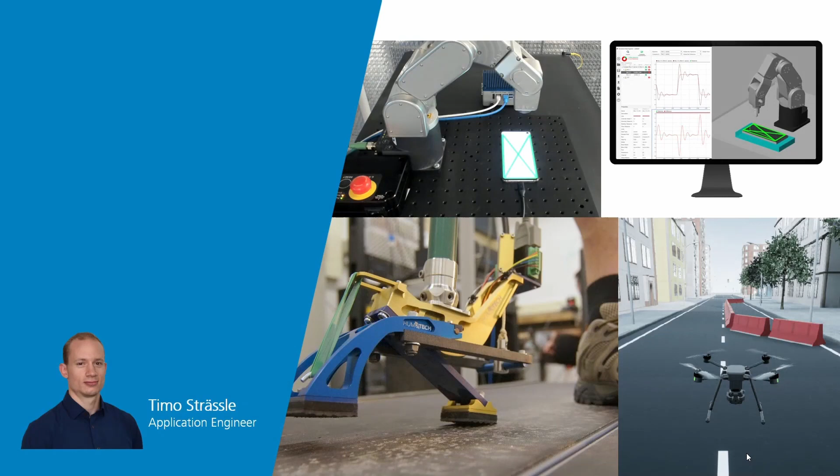In today's webinar, I will show you how to use Speedgoat real-time testing solutions to accelerate development of autonomous systems and other robotics applications, like industrial automation or vision processing systems.

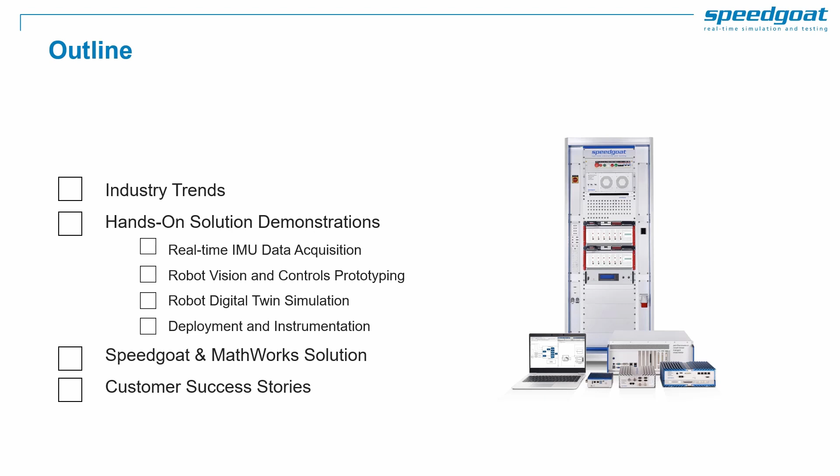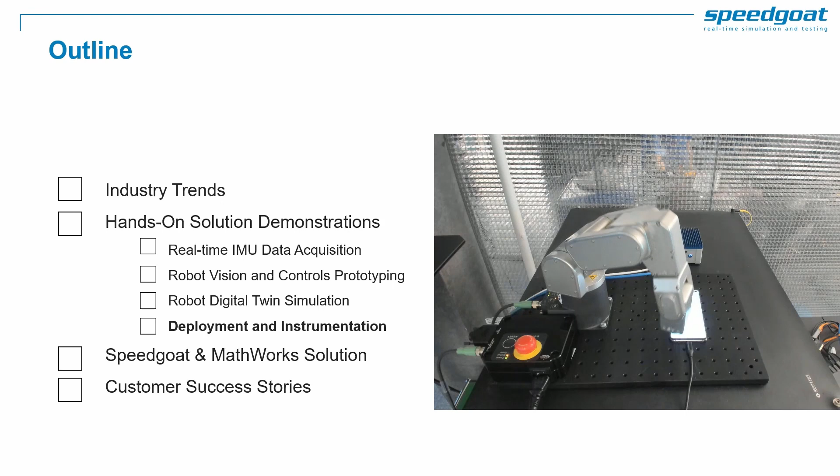We'll start with an overview of some of the main challenges we see in the area of robotics and autonomous systems. Then we'll go over multiple examples and workflow demonstrations using Speedgoat target hardware and Simulink Real-Time. I'll start with data acquisition from an IMU, followed by controls prototyping for a vision-guided robot. We'll see how you can design a digital twin for virtual testing. And lastly, an example for deployment and instrumentation.

In the end, I'll wrap it up by giving you a full overview of the combined Speedgoat and MathWorks solution for real-time testing and give you some insight into how our customers apply these tools in the field.

Let's start with an overview of the main driving industries for robotics. Although there are many other applications, we see the biggest interest in the following fields. Firstly, the medical sector. Robot-assisted surgery is a huge topic, here illustrated with a heart surgery robot by our customer Corindus. Rehabilitation equipment also benefits from robotic systems developed with Speedgoat hardware, like the ankle-foot prosthesis by Humotech.

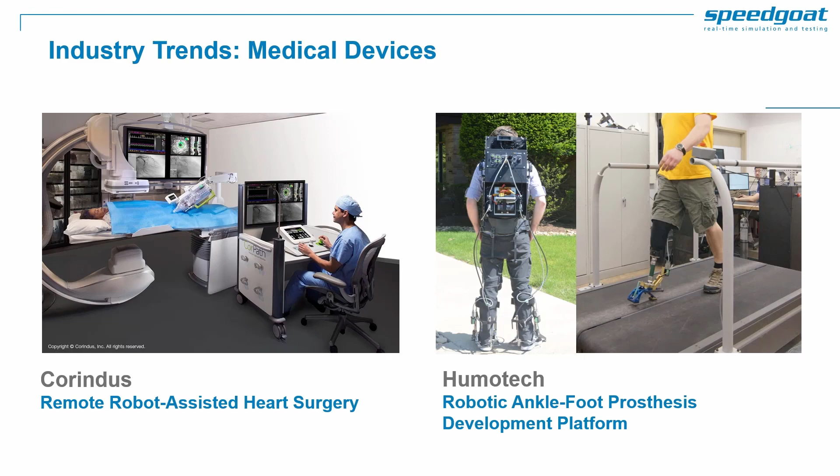Another strongly growing industry is mobile robotics. Research facilities around the world are using Speedgoat real-time systems to develop autonomous mobile robots operating in water, on land and even in space, using all kinds of locomotion methods.

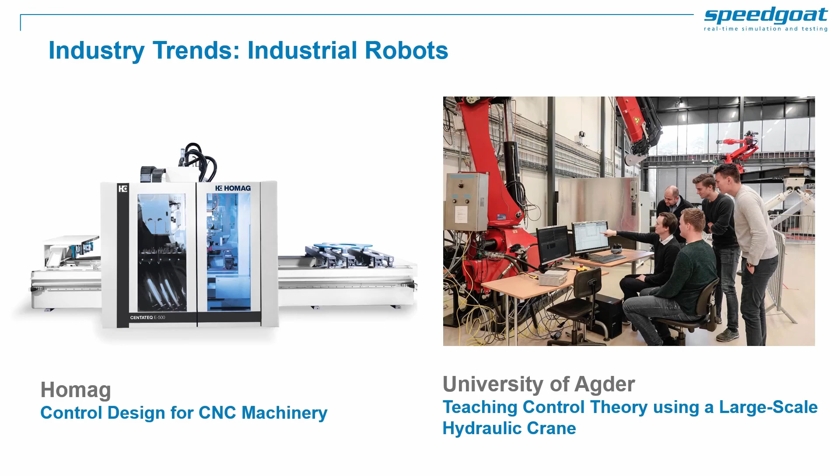Industrial robots used in manufacturing make processes continuously more efficient, reliable and safe. For example, HOMAG uses Speedgoat machines to develop cutting-edge control algorithms for CNC machines. And University of Agder is training the next generation of mechatronics engineers using a large-scale hydraulic crane controlled by Speedgoat.

All of these areas have some challenges in common. They typically require you to develop and test complex control systems, to control many degrees of freedom with high precision. Maybe you want to use modern methods like model predictive control or reinforcement learning.

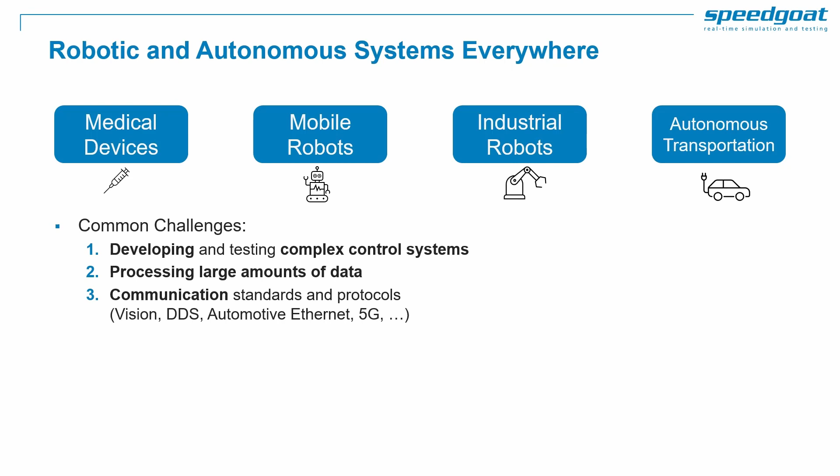To achieve automation, there's often a large amount of sensor data which needs to be fused and processed in real time. The data is also often transferred using new communication protocols. Maybe you need to incorporate cameras or LiDAR, or want to set up data distribution service between different devices.

Lastly, many areas require strict safety and certification requirements to be met. So you need to perform rigorous testing as development progresses. Keeping up with the pace of innovation is a challenge of its own. Leading engineering companies have to deliver smarter and more power-efficient products to stay competitive in such a dynamic market.

To address these challenges, robotics engineers have been progressively relying on model-based design and real-time simulation and testing to efficiently design, develop and test their new embedded controllers.

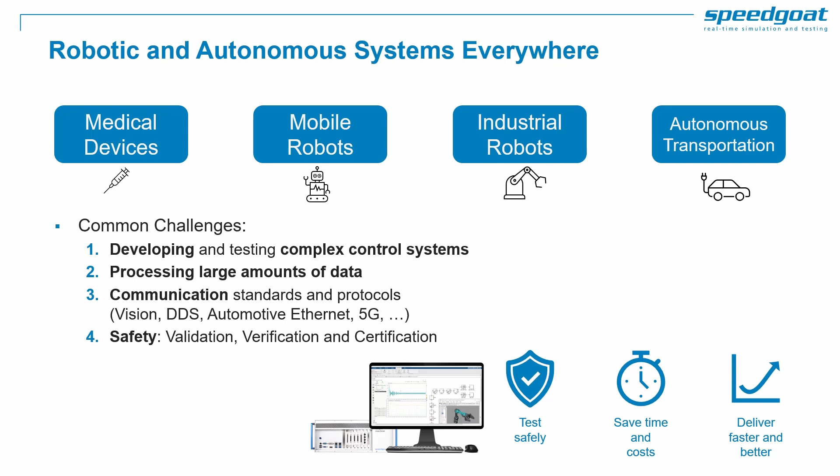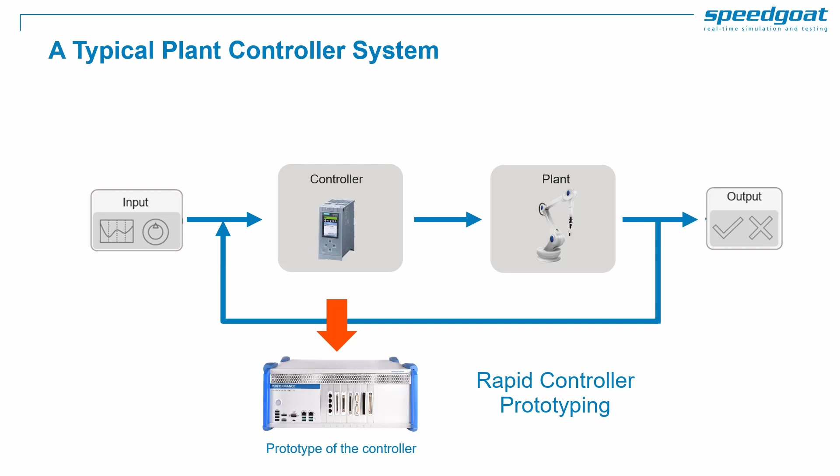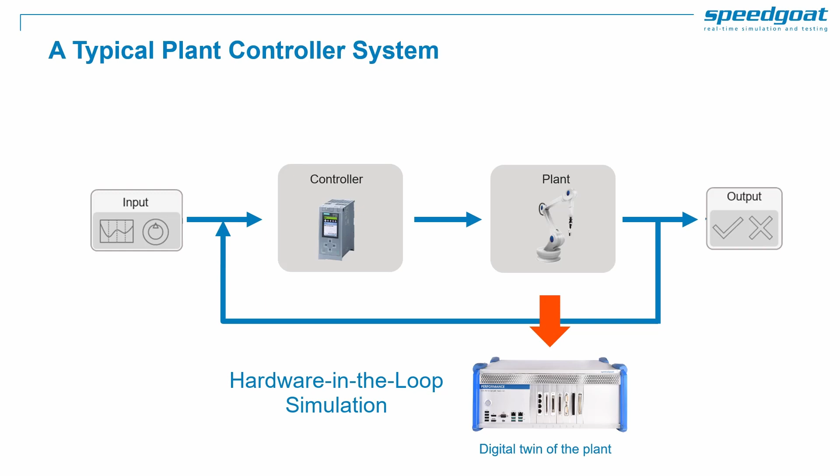In a later step, you want to test your embedded controller extensively in realistic scenarios. You can do this by connecting it to the Speedgoat target machine working as a HIL simulator, running a digital twin of the plant. This allows you to test earlier, automate your tests, and cover edge cases, which would be dangerous using the real plant. As you can see, the real-time target machine forms an essential component in prototyping a plant controller system.

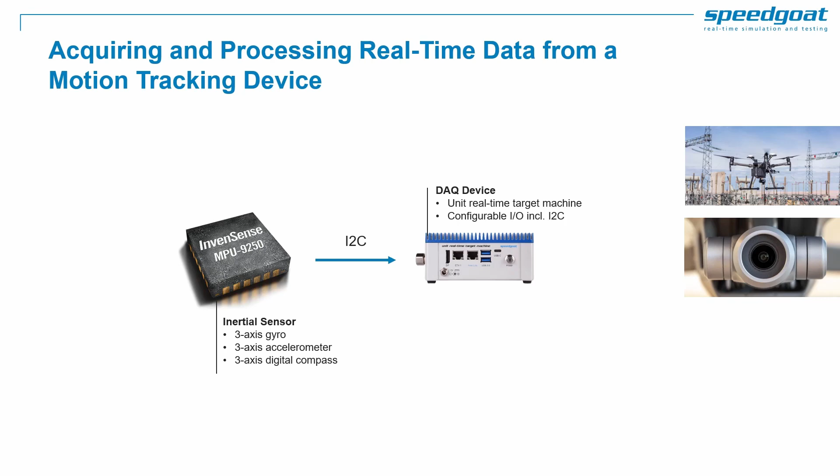Let's now look at our first example of a workflow needed before you even start working on your controller. When starting real-time testing, you often need to integrate new components, like sensors and actuators, and set up the required interfaces. Perhaps your goal is developing a UAV attitude controller, a camera stabilizer, or a new multi-joint legged robot, and this requires you to interface with inertial sensors.

I'd like to show you how you can combine Simulink with Speedgoat hardware to support you on such tasks. More specifically, we will connect to an inertial sensor, perform spontaneous real-time measurements and data pre-processing. I'm using a 9-axis inertial sensor which communicates over an I2C protocol, a common serial interface. To set up and test the sensor, I use a Speedgoat unit real-time target machine, our smallest form factor. So let me switch to MATLAB and Simulink to show you how this works.

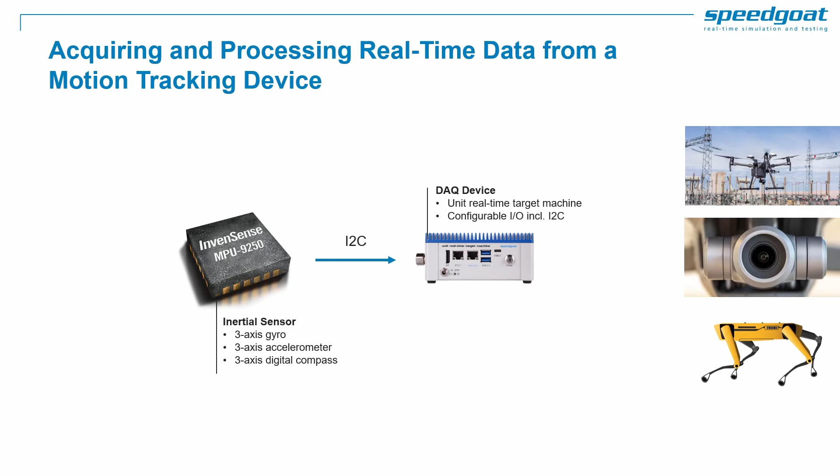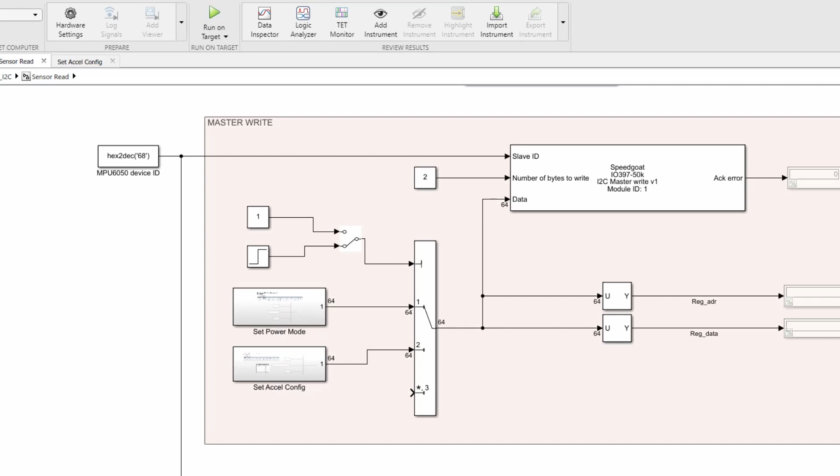In the Simulink model, you can see on the left side the subsystem where we take the sensor readings from the IMU. To communicate with the sensor, I'm using the IO397 configurable I/O module. Configurable means that it can easily be reprogrammed with configuration files that enable different functionalities, such as the I2C interface which I'm using here. For communication, we need the device ID and register addresses to read from or write to. I set up 2 write signals here to configure the sensor, and then we want to continuously read out 14 bytes of data containing the accelerometer, temperature and gyroscope data.

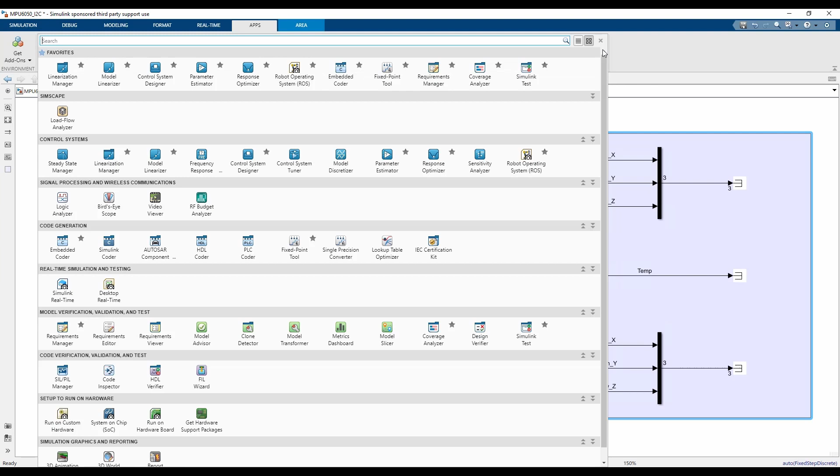I have already selected these output signals for logging to the simulation data inspector. To log additional signals, just click on it and choose Log Selected Signal. My model is already configured for real-time execution, but for any other Simulink model, you could simply go to the Apps tool strip and select Simulink Real-Time to adjust the needed settings. Namely, this will configure the model to use a fixed step solver and generate code for Simulink real-time targets.

Directly from the Simulink tool strip, I can now click Run on Target, which will compile, deploy and run the model on the Speedgoat real-time target machine. While the model is running in real time, I can observe the logged signals in the simulation data inspector and verify that we are in fact getting sensor data, and the signals reflect the movement of the sensor.

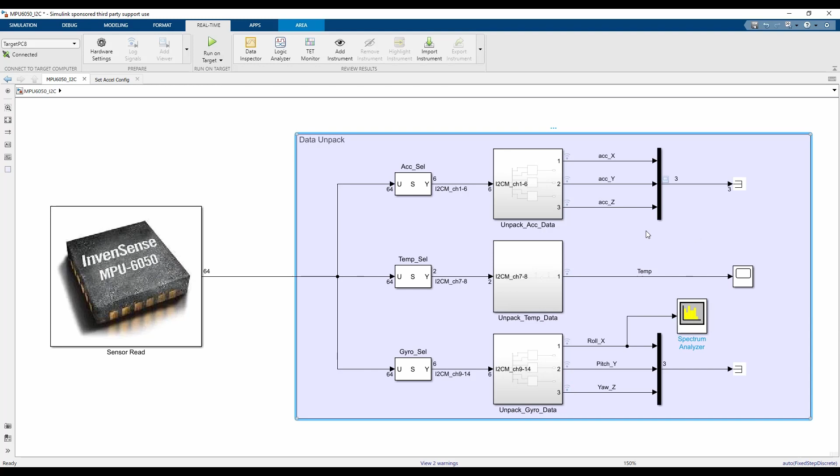Aside from the simulation data inspector, you can also use specific Simulink blocks to analyze your signals, like a scope or a spectrum analyzer. Similar to SDI, these blocks allow us to visualize the data while the model is running. The scope has many functionalities similar to an oscilloscope, like cursor measurements, bilevel measurements or triggering. The spectrum analyzer could be useful, for example, to analyze the noise in our IMU signals and design a filter to improve the signal-to-noise ratio.

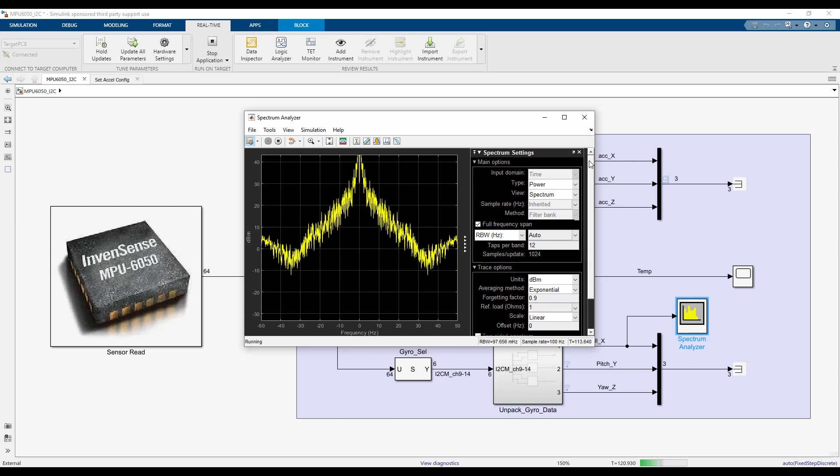I hope this illustrates how quickly you can run your models on Speedgoat targets directly from Simulink and connect with sensors and other hardware using the Speedgoat I/O block set.

Allow me to share the success story of our customer Preceyes, who has used Speedgoat and Simulink Real-Time to develop the world's first eye surgery robot. While constructing a model of the robot's kinematics and dynamics, the engineers use data acquisition workflows for system identification. They use Speedgoat target hardware with EtherCAT interfaces to excite the robot's motors and measure the response. The team then used the same target hardware to develop a controller model that processes input from a joystick and around 60 sensors and generates motor commands in response to the surgeon's movement.

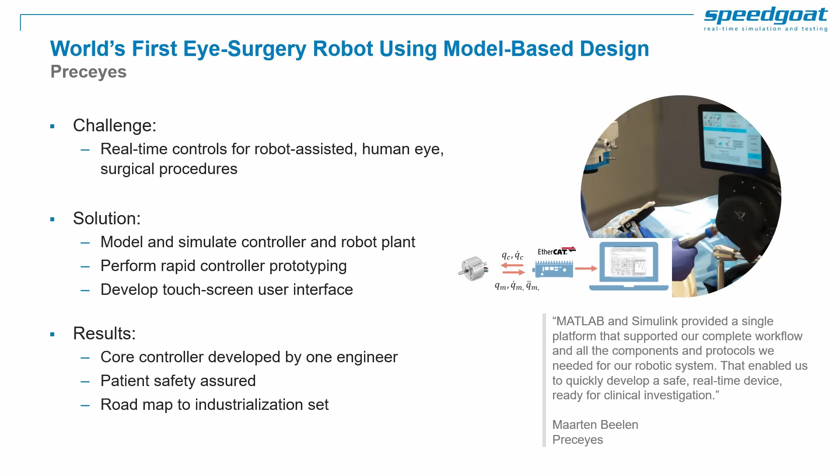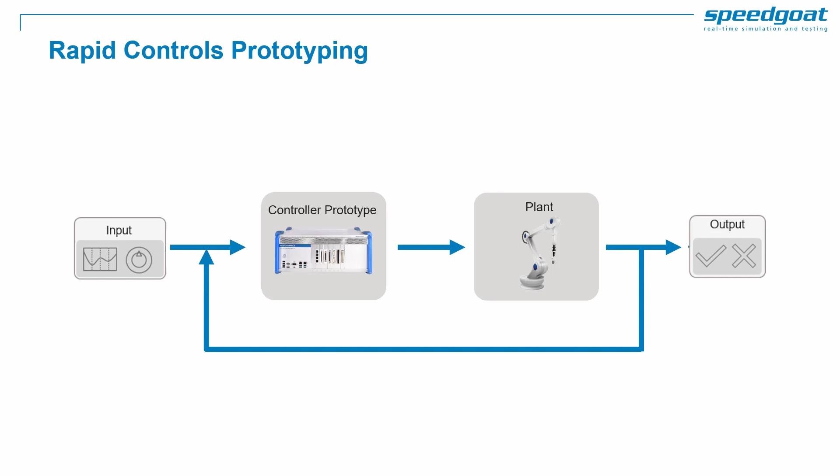So they followed up data acquisition with rapid controls prototyping, which is what we will look at in the next example. We'll work with a prototype controller deployed to a Speedgoat machine, and the plant will be an actual industry-grade robotic arm with a gripper.

Let's imagine a scenario where you develop a factory robot, which is used to detect and remove defective or faulty parts from a conveyor belt. Inspection of the parts is done using images from a gigabit Ethernet camera, and the defective parts are detected with computer vision. The Speedgoat performance real-time target machine will handle this task, as well as generating movement commands for the robot to pick and remove the respective parts. The communication interfaces in this example are gigabit Ethernet for the camera input and EtherCAT, a widely used industrial protocol to control the robot arm.

This is my hardware setup for testing. As objects, I'm simply using differently colored balls, where the red ones represent defective parts which need to be removed. The camera is mounted in a fixed angle overhead, on the opposite side of the robot.

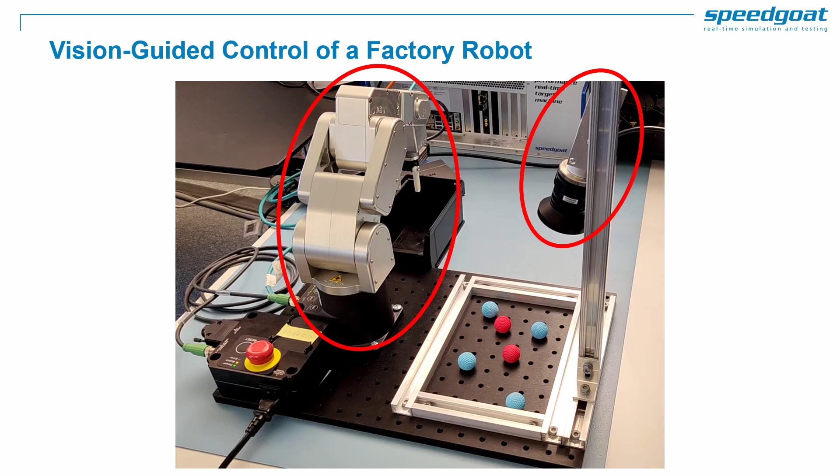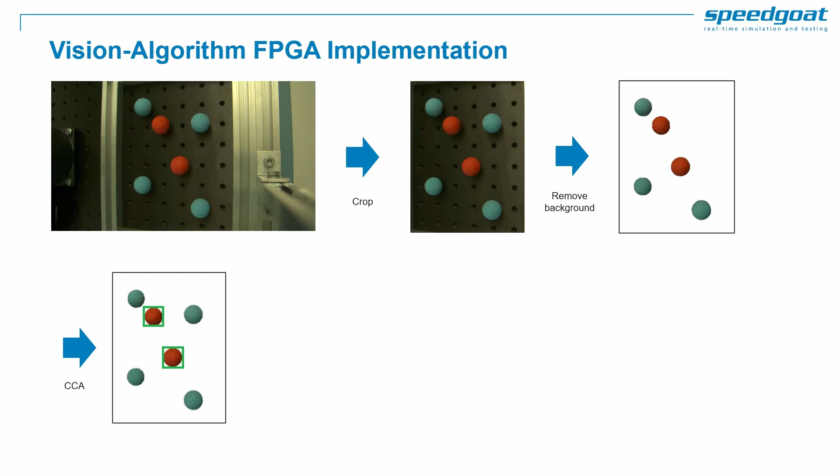Let's first see how the computer vision algorithm works on a very high level. The overhead camera image is cropped to the area of interest, and thresholding on an intensity image is used to remove the background. An algorithm for connected component analysis, or CCA for short, then calculates the bounding boxes and center coordinates for each object, and we filter them by primary color to detect the red balls. Finally, we transform the detections from the pixel coordinates into the robot's frame of reference and send them down the data stream.

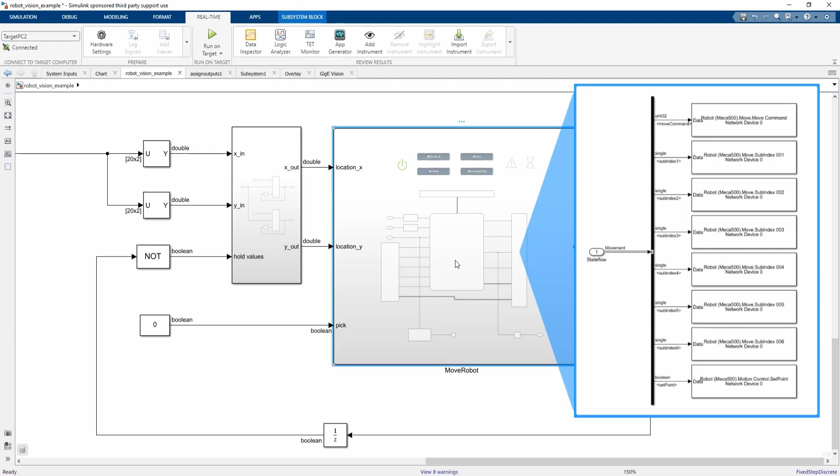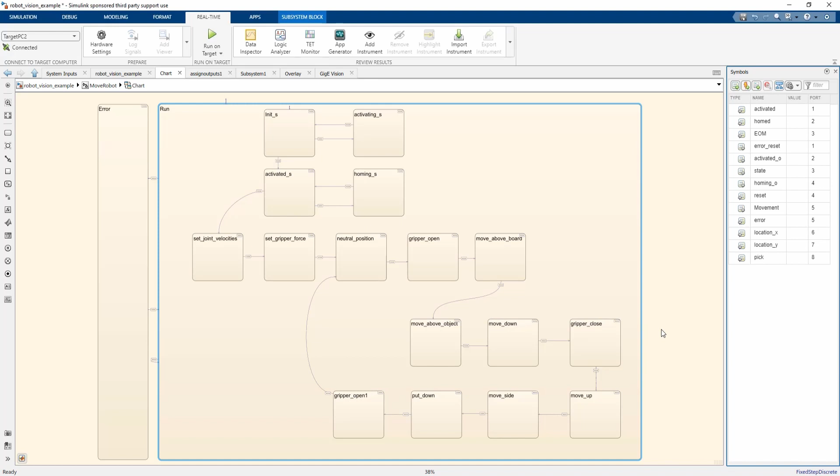The object detections are then fed into the supervisory controller for the robot arm as planar X and Y coordinates. The move commands generated by the controller are sent to the robot using EtherCAT transmit blocks from the Speedgoat I/O block set. I won't go into the details of the inner workings of the controls, but it basically consists of a state machine which goes through all the necessary initialization steps, then keeps the robot in a neutral position until we trigger it to pick an object. Once we do that, a trajectory to the object is generated, the robot moves to pick it up and puts it in a container to the side.

I have also added 2 dashboard indicators to observe the state of the system and a trigger button. I'm already connected to the real-time target machine, as we can see in the top left corner of the Simulink tool strip. So I just click Run on Target and the model is compiled, loaded and executed on the target.

You can see the robot on camera here, and the dashboard shows that it is initialized and objects have been detected. So when I click the Pick button, the robot will move to the first object from the list and remove it. I simply click the button again while objects are still being detected. Of course, this could be fully automated later, but for testing it is handy to have these controls.

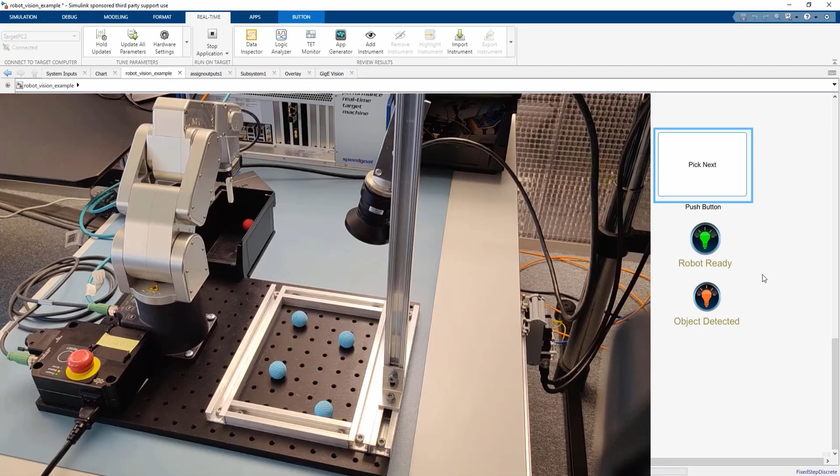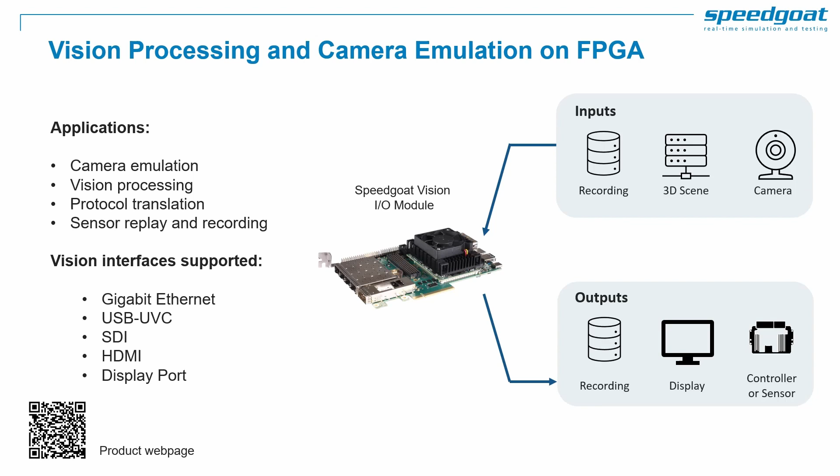Now you might still wonder how the target machine is able to process high-resolution video data in real time. The vision algorithm is actually running on an FPGA, our real-time vision processing I/O module. It supports various vision interfaces, such as USB UVC, Gigabit Ethernet, SDI and HDMI. With clock rates in the range of 100 MHz, it allows to process high-resolution, high frame rate video streams in real time. It can read in or emulate multiple cameras simultaneously, record and replay files, and is fully Simulink programmable.

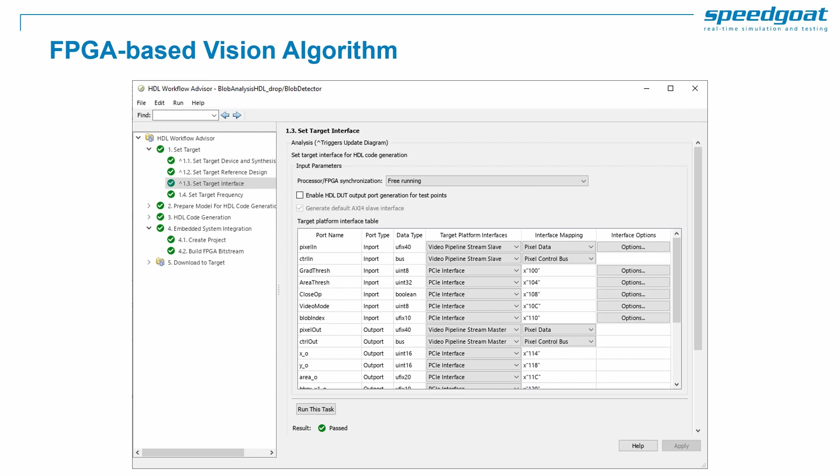The algorithm I'm using in the robot example is based on a shipping example from MathWorks Vision HDL Toolbox, which I am linking here. This model is a bit too complex to discuss here in detail, but I encourage you to take a look for yourself. From this Simulink model, we can then generate HDL code to deploy to the FPGA by simply going through the HDL Workflow Advisor. This is where we map Simulink signals to hardware interfaces, define clock rates, and so on. It's a simple step-by-step process, allowing you to seamlessly integrate high-speed vision processing into your real-time tests. And this wraps up our vision-guided robot example.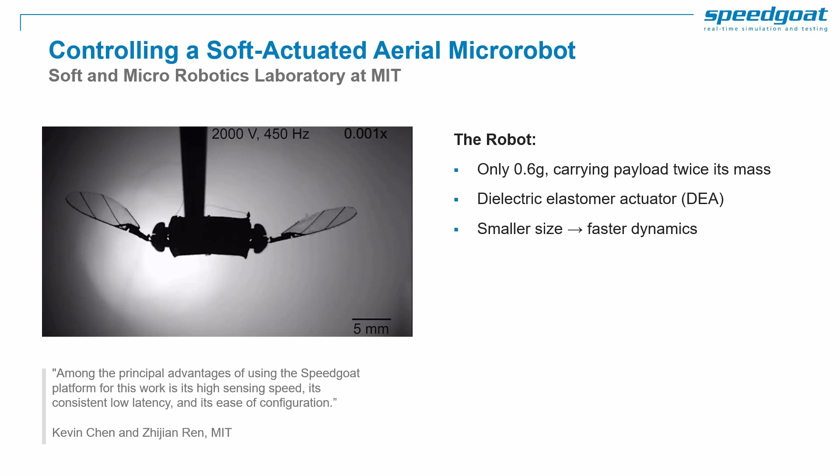To conclude the RCP section, I'll share a customer story from the Soft and Micro-robotics laboratory at MIT. The researchers are using artificial muscles to power insect-like aerial micro-robots. As the size of these robots shrinks, the dynamics become faster, therefore requiring higher sensing and control rates. With 450 wing flaps per second, the feedback control needs to run at 10 kHz frequency.

The researchers model and simulate the dynamics at different fidelity levels to identify the optimal wing shape. Various experiments are performed to identify the mapping from actuator inputs to lift, resulting in an accurate flight dynamics model. This is then used to test new control algorithms in closed loop without risk of damaging the real robot. And finally, the controls are seamlessly tested using the real robot by interfacing the Speedgoat machine with a Vicon motion capture system and sending actuator commands to the robot.

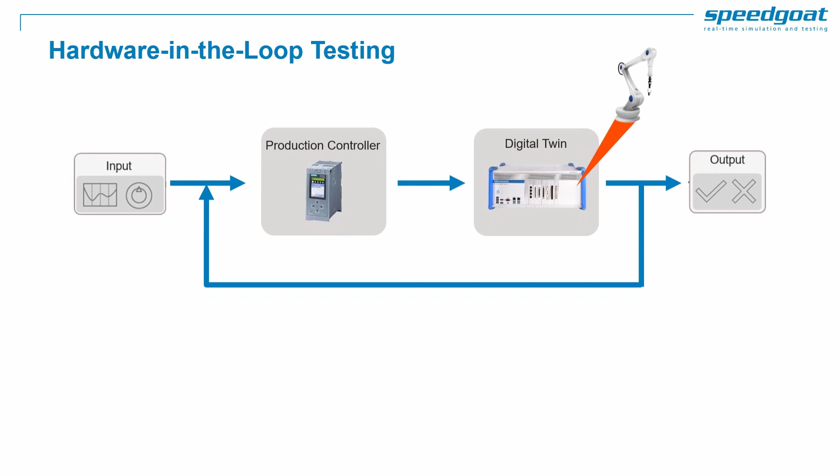Up next, I would like to discuss an example for hardware-in-the-loop testing. This is where you test your production controller against a digital twin of your plant. Some of the main benefits of HIL are: you can test in a safe, yet completely realistic environment. You avoid a lot of logistics overhead from only testing with prototypes. You can even test when the real system is unavailable, and therefore start testing earlier. Virtual testing can also be fully automated.

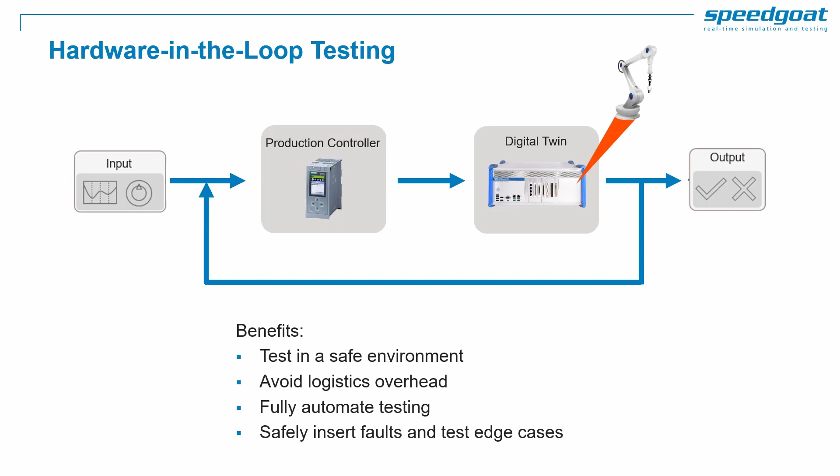You can go through various test cases and accumulate hours worth of test data without requiring any user input after the start command. And last but not least, you can inject faults and test edge cases of your controls problem without risk of damaging the real system. A main challenge here is often how to create a realistic and accurate digital twin model of your real system. Let's look at an example for our Meca500 robot.

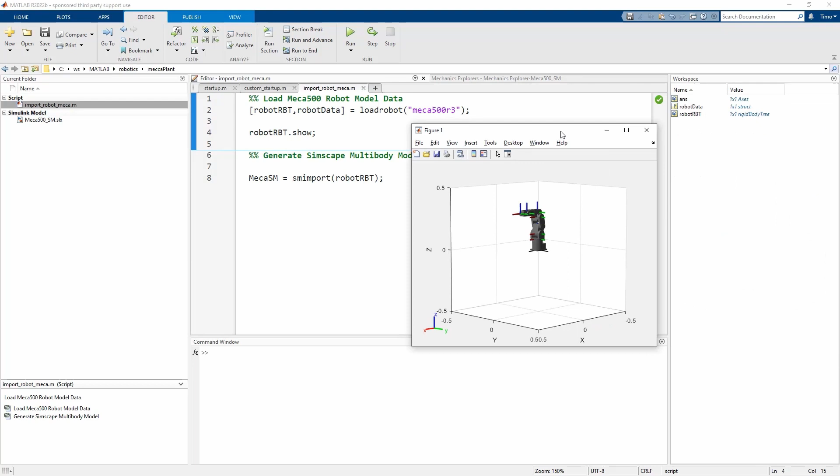When you buy robotic components off the shelf, you typically get the CAD 3D models with it, so I'd like to show you how you can use those for creating a Simscape model. For the Meca500 robot, the CAD data is even directly included in Robotics System Toolbox, along with many other 3D models. One simple command loads the data, and we can already view a 3D representation of the robot.

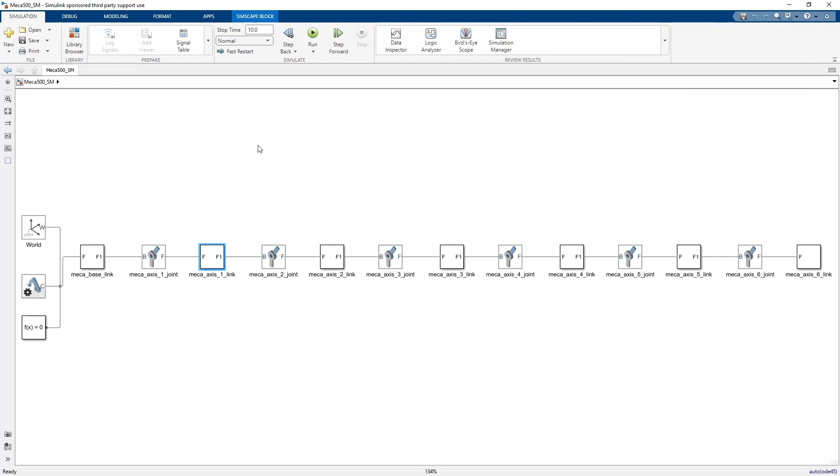Using the function smimport, we can then generate a Simscape Multibody model from it. Here we can see the generated links and joints, adjust parameters such as inertia and mass distribution, or let MATLAB automatically calculate these values from the parts geometry. When we simulate this model, the Mechanics Explorer shows us a 3D visualization of the scene.

So this is just a blueprint model with no controller yet, but it can quickly be used to perform kinematic or dynamic simulations and develop motion planning and motor control algorithms. To get a head start in adding the controls, we can, for example, refer to one of the many examples shipped with Robotics System Toolbox. The example, Model and Control a Manipulator Arm with Robotics and Simscape, seems perfectly suited for this.

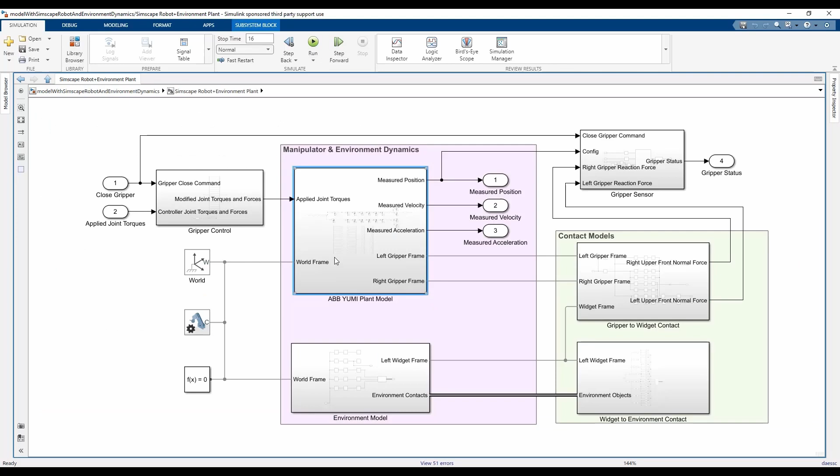When we open the model, we can find a similar Simscape implementation of a different robot arm, which we could replace with the one generated from our CAD model. Then we have models for gripper control, joint torque control, and trajectory planning, which we can explore, customize, and adapt to our needs.

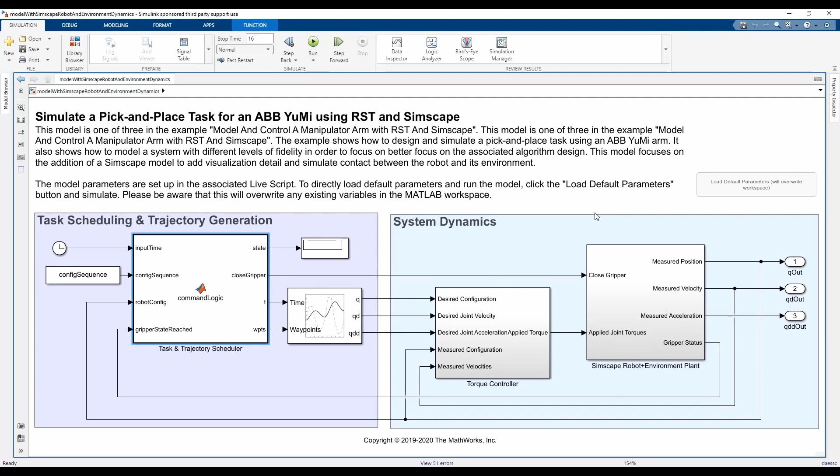In a recent master thesis project sponsored by Speedgoat, the student implemented such a digital twin model of the Meca500 robot to test his controls for use of the robot as an automated touch device tester. He enabled the robot to automatically perform a full factory test of touchscreen devices, such as a smartphone. We will come back to this application in the next example, so keep this in mind.

But first, I'd like to share another interesting customer success story involving digital twin HIL simulation. Our customer Leclanché develops lithium-ion battery packs for automated guided vehicles for factories and warehouses. This includes optimizing battery management systems, state of charge and state of health estimation. But running tests on real batteries has limited coverage, is very time-consuming and prone to errors.

Another drawback is a lack of preliminary testing possibilities, which means bugs can often only be found in later development stages. Leclanché decided to address these issues with a hardware-in-the-loop test bench from Speedgoat. With full cell emulation and detailed battery models built with Simulink, they can now automate many of their tests and test edge cases, faults and disturbances safely in simulation. This cut testing time in half, while increasing test coverage and allowing for much earlier bug detection.

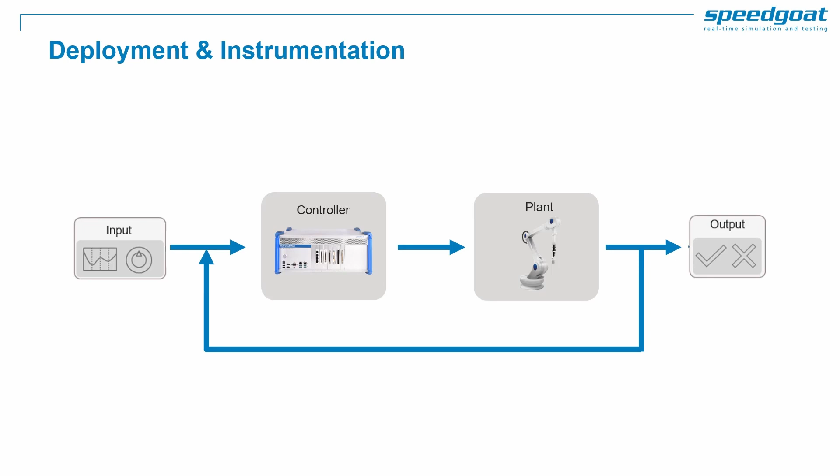Now for the fourth and final application example for today, we'll look into deployment and instrumentation. At this stage, you may want to open up access to your real-time application for non-Simulink users, like test engineers, and provide them with customized user interfaces. Let's revisit the example of our robotic touch device tester.

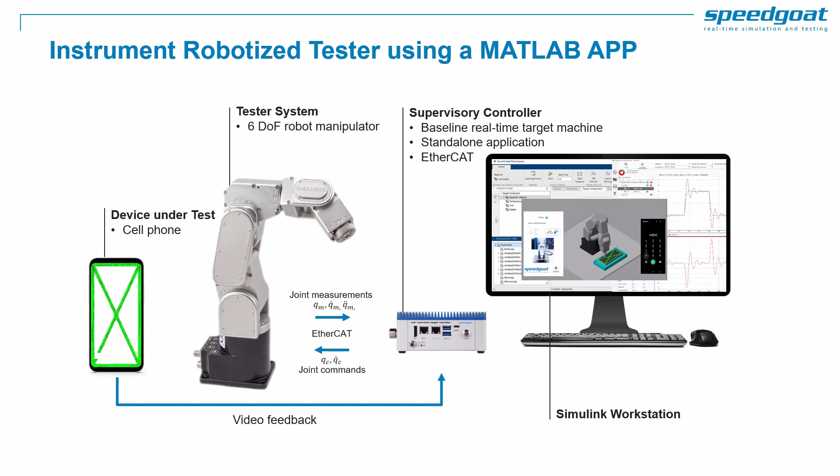At this stage, you finished fine-tuning of the supervisory controller to control the 6 degrees of freedom manipulator using the Speedgoat with EtherCAT interface. It is now time for you to design a user interface that will be later used by operators to run automated test routines. In this case, you can use MATLAB App Designer and its integration with Simulink Real-Time to quickly create standalone user interfaces.

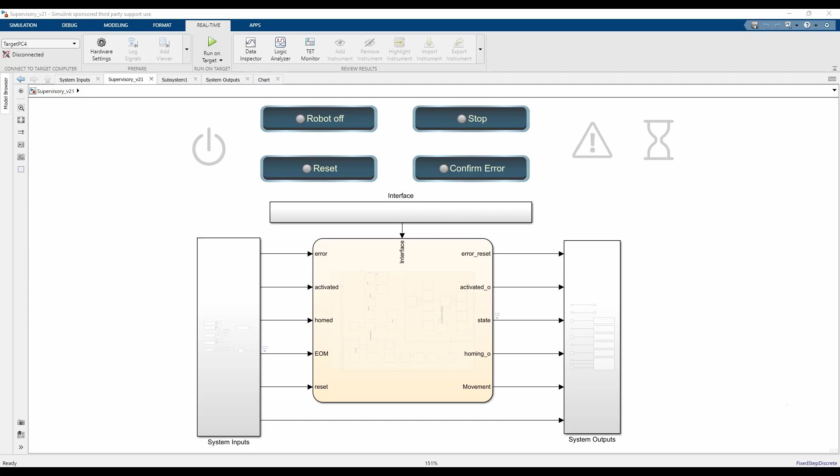The Simulink model is quite similar to the motion control part from the last example, with different trajectories. But what we will focus on now is the user interface built with MATLAB App Designer. Here you can see the App Designer window and the app I have created so far. This is the design view, where we see a graphical preview of our user interface, which we can modify with just drag and drop.

There is a UI axis plot where I will display the phone screen image, and then we have some buttons and status lamps to interact with the robot. Of course, we need to code what's going to happen when each button is pushed, so this is done using callback functions. We can jump to the callback function by right-clicking the UI element and selecting the callback, which will switch over to the code view.

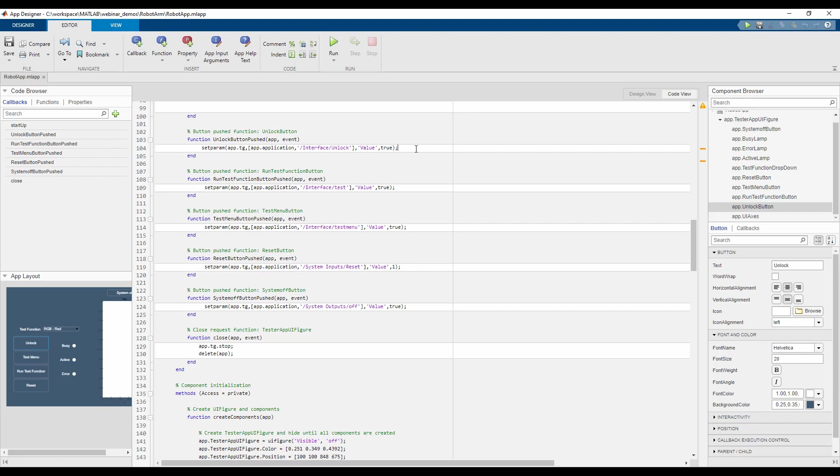The grayed out parts of the code are automatically created when you add an element in the design view, and we only need to add the core functionalities. Here we are setting some parameters on the target machine using the setParam command. Similar for the lamp indicators, we have functions to set the color based on status changes.

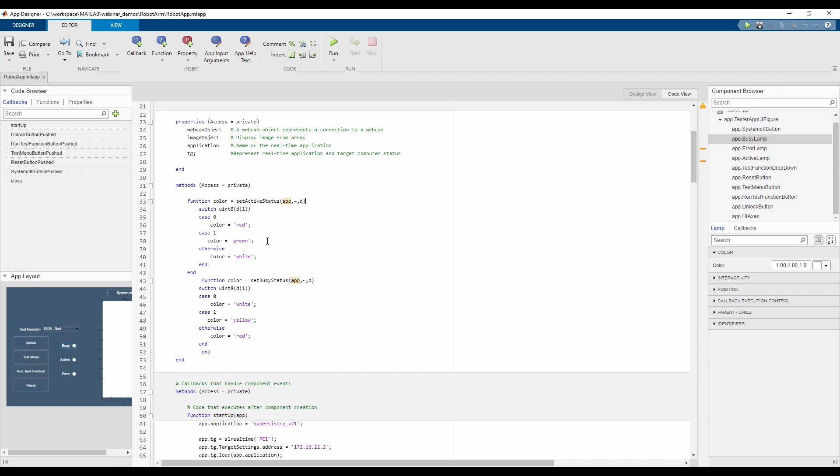What's still missing though are some buttons to interact with the target machine itself. In the App Designer library, we can find some pre-built buttons from Simulink Real-Time. These require no coding at all, taking a lot of work off my shoulders. I think I will need a drop-down menu to select the target machine and a start button, of course. And before we can start, we also need to connect to the target machine. And finally, it's always a good idea to have some status indicators.

As said, these buttons work without any additional coding, but sometimes you still want to add additional functionalities. In that case, you can still add another callback function. App Designer then creates the function stub, and you can simply add everything else you need the function to do. When we're ready to test our app, you just click the Run button and App Designer will compile and start your app. So now, let's see our robotic touch device tester in action.

On the left side, you can see the screen capture of the MATLAB app I just showed you, and on the right, a camera view of the robot. We only have to click a few buttons now, and the robot will do all of the work for us. First, we start the real-time application on the target computer, and the robot will automatically perform a homing movement. Then we proceed with telling the robot to unlock the test phone with the factory default PIN code.

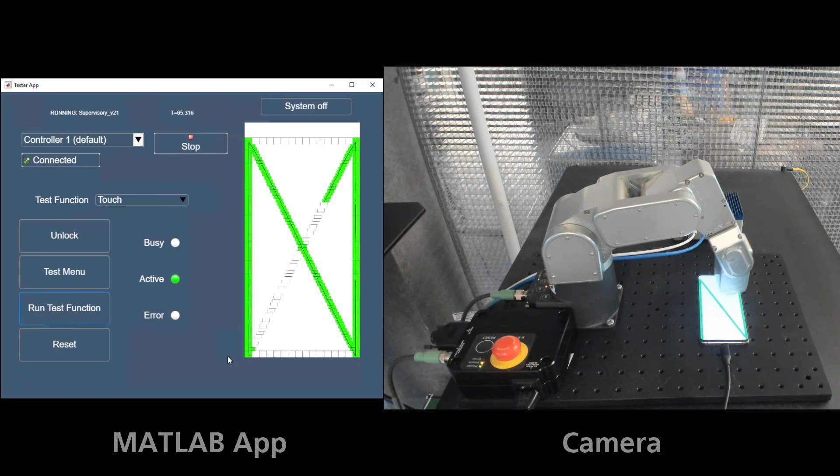Afterwards, we select to open the test menu, which is done by entering a standardized sequence on the dial screen. And finally, we run our test function, which will start and execute the touchscreen test. On the direct video feed from the phone, we can clearly observe if all the checkboxes are turned green. This check could of course also be automated in a later step using image processing. With the test successfully completed, the phone goes back to the test menu and we will go back to the presentation.

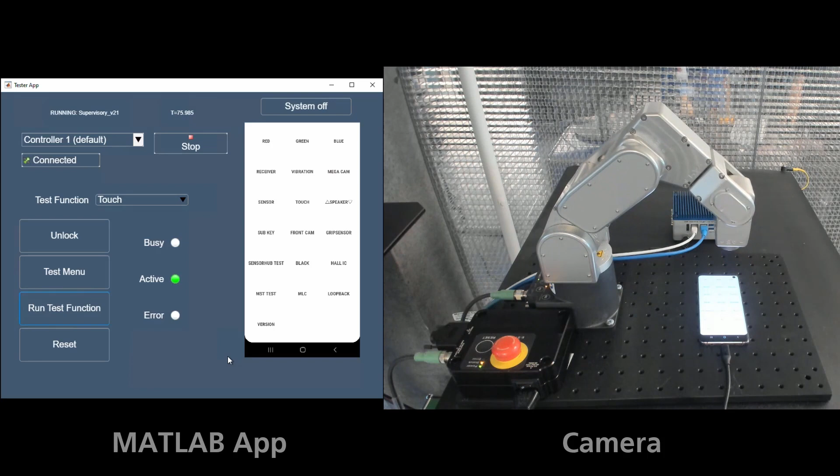Now let's also chat about using a real-time target machine as embedded controller for your prototypes and smaller series. You may ask why, and that's totally fair. So first, you get the closest connection possible to Simulink to implement controller changes. Second, you have less or no constraints on your compute resources, especially when you are trying different control concepts. Third, a real-time target machine ensures deterministic real-time behavior of your controller, which a desktop environment can hardly provide. Overall, it's not only great for testing and verification and validation, but also leads to reduced costs and risks.

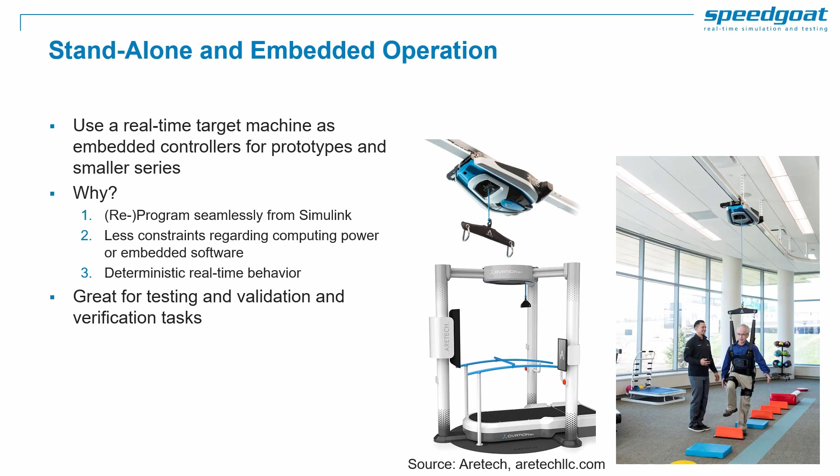For example, we have a customer that uses real-time targets for robotic support systems, as depicted on the screen. But it is also suitable for many other applications. So, now you have seen different examples, ranging from data acquisition to controls prototyping, hardware-in-the-loop testing, and deployment and instrumentation. Let me now give you an overview of how Speedgoat test systems, together with MATLAB and Simulink from MathWorks, form the most powerful and unified test platform. I will point out key benefits of this solution, the hardware enablers and software enablers.

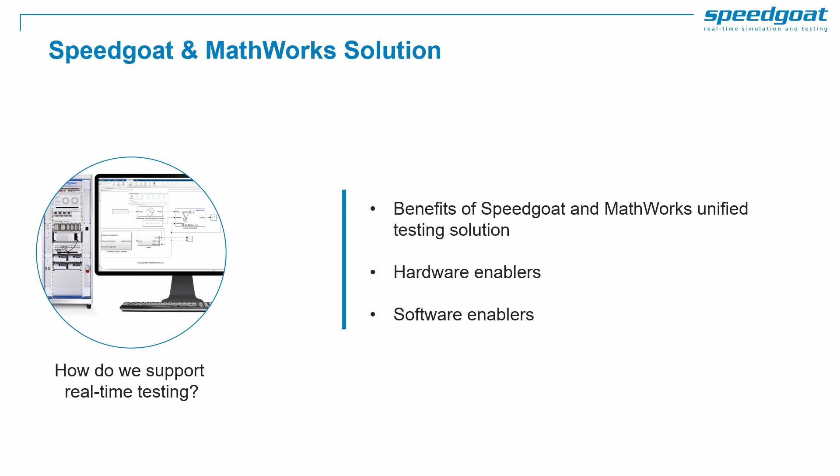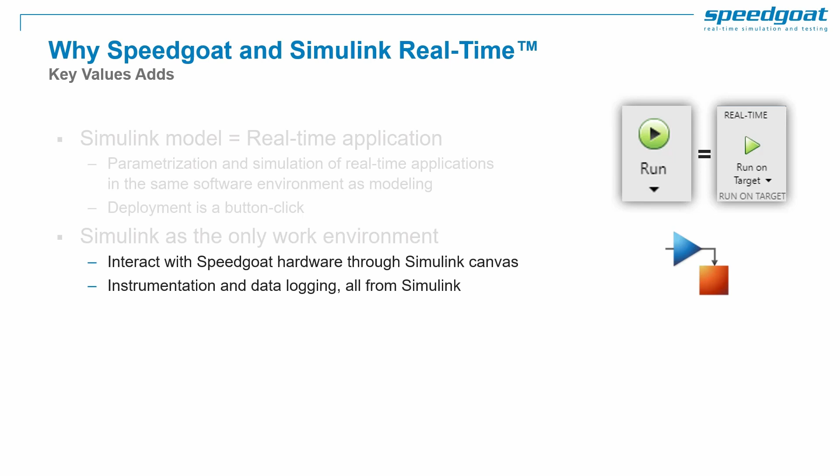Now, why work with Speedgoat hardware and Simulink Real-Time? In summary, and most simplistically, when you work in Simulink, there is literally no detour to get to your real-time application. It's practically the same. You parameterize your real-time application in Simulink and also deploy it from there. So Simulink isn't only your modeling environment, it is also your hub for all kinds of testing, including logging, instrumenting, and configuring your hardware to run.

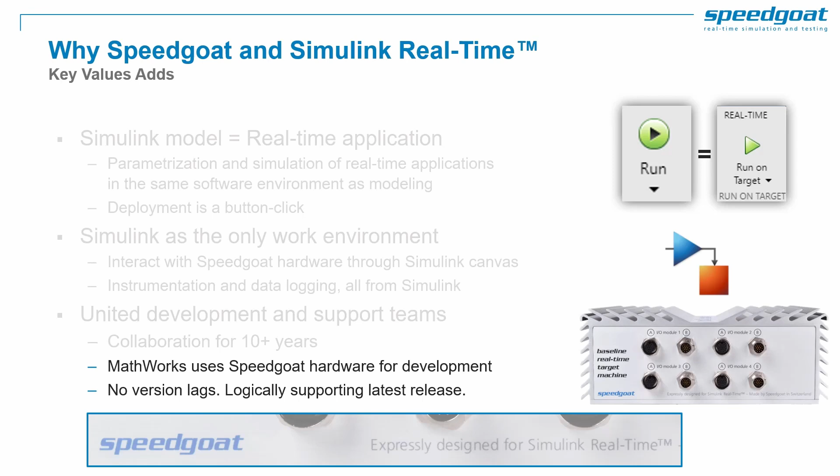Simulink and Speedgoat development has been happening hand in hand for more than 10 years. Hardware and software are expressly designed for one another, so you won't experience any version lag. I have asked Jay Abraham, Group Manager for Real-Time and Verification Products from MathWorks, to share with us the MathWorks view on this collaboration.

Thanks for bringing this up. Happy to share the MathWorks view on how we work closely with Speedgoat to provide our mutual customers with a fully integrated and best-in-class real-time simulation and test solution.

To enable this fully integrated software and hardware platform, MathWorks and Speedgoat engineering teams collaborate very closely. For every release of MATLAB and Simulink, we check that the products work out of the box with Speedgoat hardware. Furthermore, we ensure that the workflow leverages the power of model-based design, for example being able to reuse tests from desktop simulation directly on the real-time target hardware. We also coordinate with each other's support teams to make sure that the customer experience is seamless, and you can be assured that our technical sales teams will support you throughout the evaluation and purchase process.

Thanks Jay for sharing this with us. Next up, let me show you the hardware enablers for your workflows. For the great variety of different robotics applications, Speedgoat offers a wide range of real-time target machines.

For the highest power and flexibility requirements, we recommend the Performance Machine. It ships with the latest Intel CPUs and allows up to 50 I/O modules. The chassis is tailored for desktop as well as lab use. Depending on your compute tasks and the number of required interfaces, the performance machines are also designed for rack mounting.

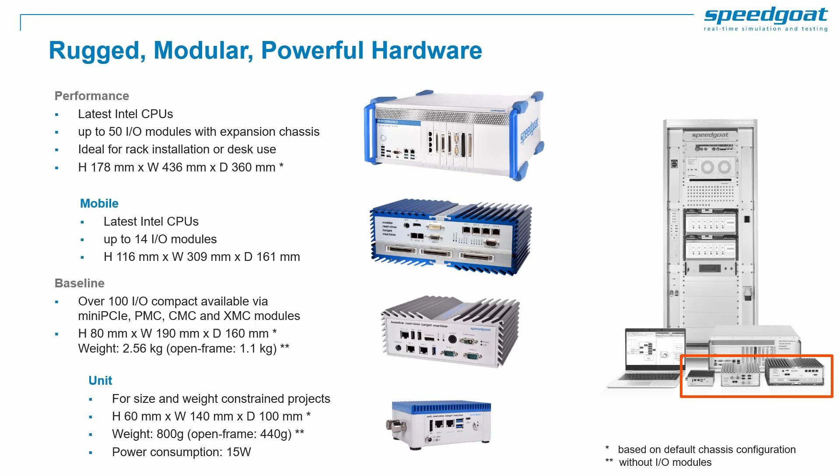On a side note, our customer sync2brain, who is developing a personalized brain stimulation therapy for patients suffering from neuropsychiatric diseases, is using a customized unit machine as their deployment control device. They recently got confirmation that Speedgoat's ISO 9001 certification is interfacing with their IEC 13485, and they achieved certification of the use of Speedgoat as an embedded device in medical control applications.

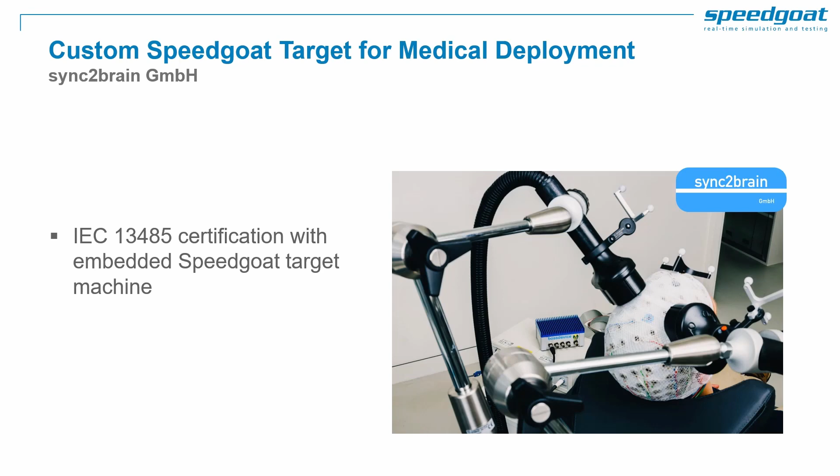No matter whether you are prototyping control strategies or testing controllers against your digital twins, hardware connectivity shouldn't be a hurdle for you. Speedgoat is supporting key protocols across all major industries. Some key mentions for robotics here are, for example, UDP, EtherCAT, CAN or serial protocols to interface with other devices. Analog, digital, SPI and I2C to connect with sensors, PWM generation and capture for actuators, and battery cell voltage and temperature emulation. More than 200 I/O modules are available and ensure that your workflows remain uninterrupted.

Now for the software enablers, I want to emphasize that you get all of the capabilities built into MATLAB and Simulink, supplemented by the Speedgoat I/O block set.

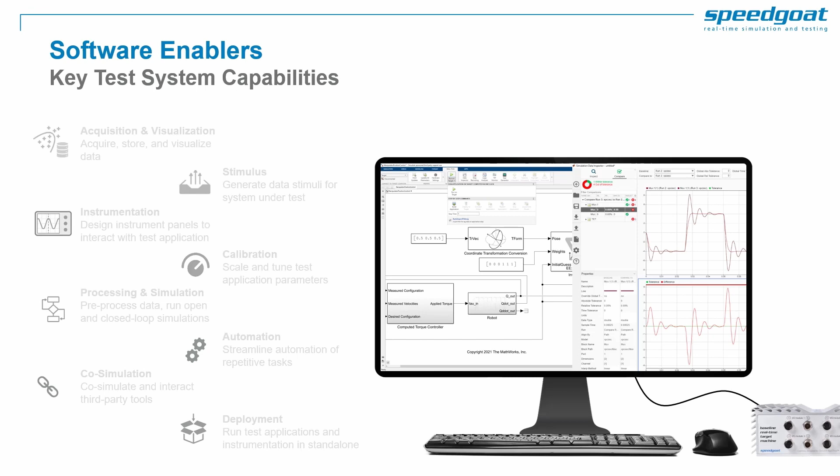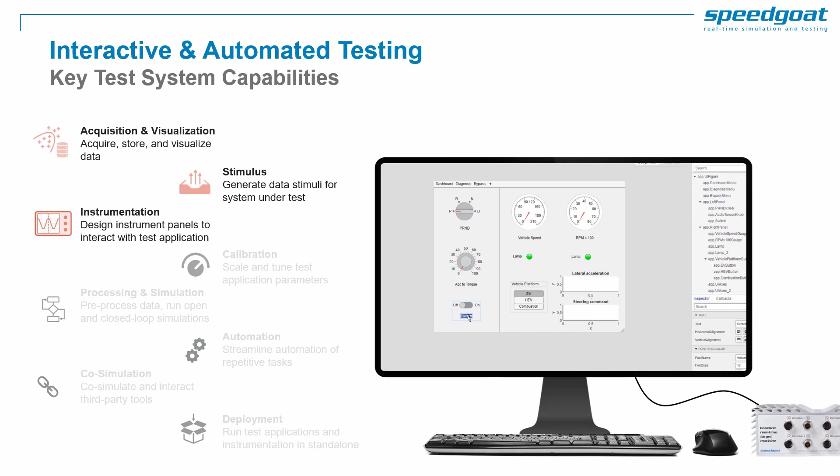Maybe you are already familiar with some of these, but let me highlight the main capabilities MATLAB excels at with regards to real-time testing. You acquire and visualize real-time data from mixed sources and perform interactive analysis with minimal effort and no coding. You trigger specific signals and test profiles. You create instrument panels that make it easier to interact with your test application. You tweak parameters to influence performance and switch between testing scenarios.

You pre-process data and simulate your complex physical systems in open or closed-loop manner. You author complex test scenarios and automate repetitive tasks. You co-simulate and interact with software environments of your choice. You deploy test applications and run them independently from the development or host computer. As I already mentioned earlier, you might also benefit from adding specialized toolboxes to your MATLAB and Simulink to simplify your workflows. Let's see some examples.

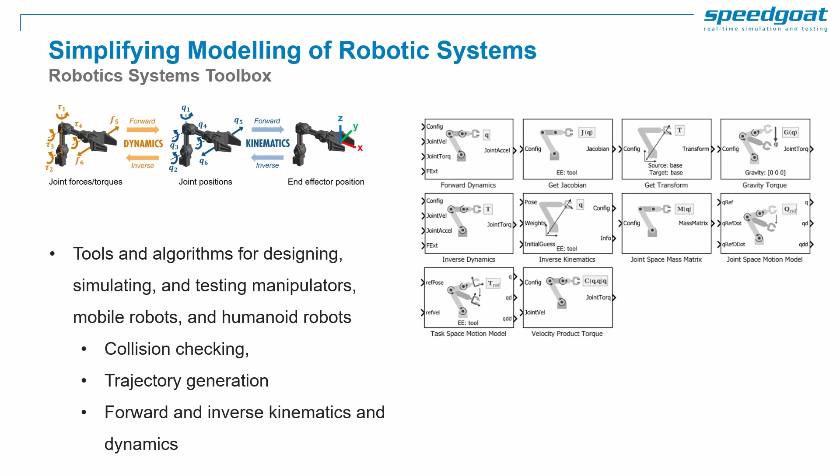Robotic System Toolbox provides Simulink blocks to easily design, simulate and test manipulators, mobile robots or humanoids. The use of these blocks simplifies tasks such as collision checking, trajectory calculation and inverse kinematics or dynamics calculations.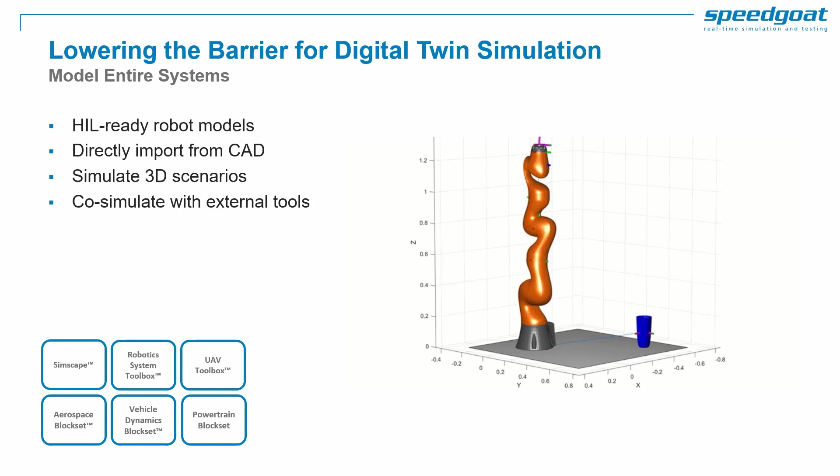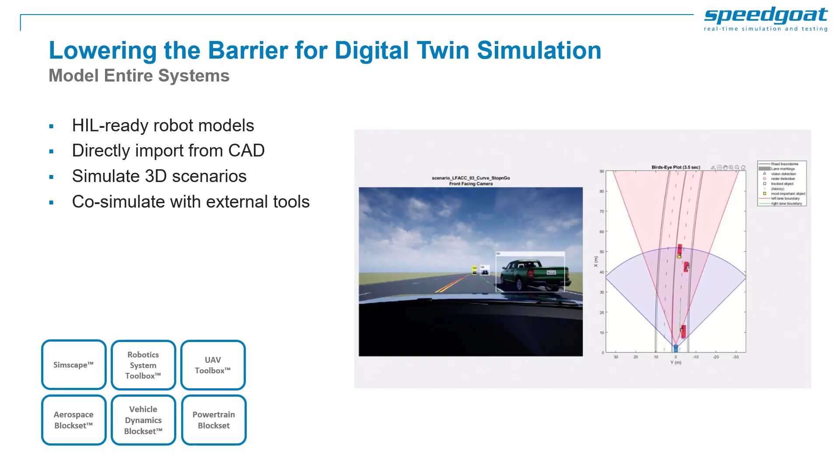For modeling multi-domain physical systems, you can leverage Simscape. Simscape offers optimized solvers for real-time simulation and is therefore suited for HIL testing. The tool also allows you to automatically create models from CAD assemblies, which greatly simplifies the creation of digital twins. It seamlessly integrates with UAV Toolbox, Aerospace Blockset, Vehicle Dynamics Blockset or Powertrain Blockset, and Robotics System Toolbox, as needed per your application domain.

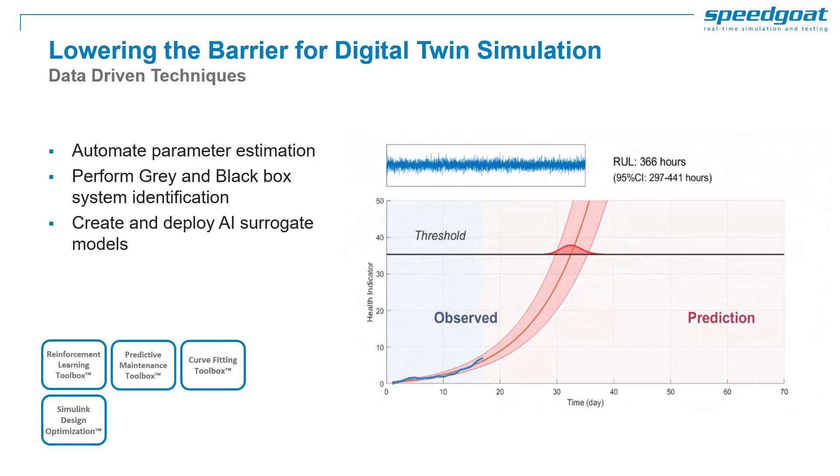You can also integrate data-driven techniques, automate parameter tuning using experimental data, train surrogate models—for instance using reinforcement learning and predictive maintenance toolbox—and deploy them as real-time agents to run on Speedgoat machines.

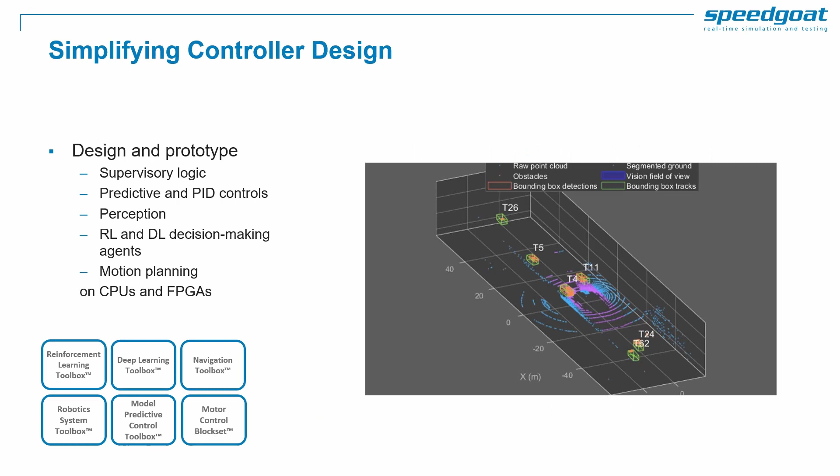One of the areas Simulink is most known for is simplifying controller design, from classical PID controls to model predictive motion planning, integrating perception and learning-based decision-making, to high-speed motion controls. MATLAB and Simulink support you in all of these areas and seamlessly run your application on Speedgoat target machines with I/O.

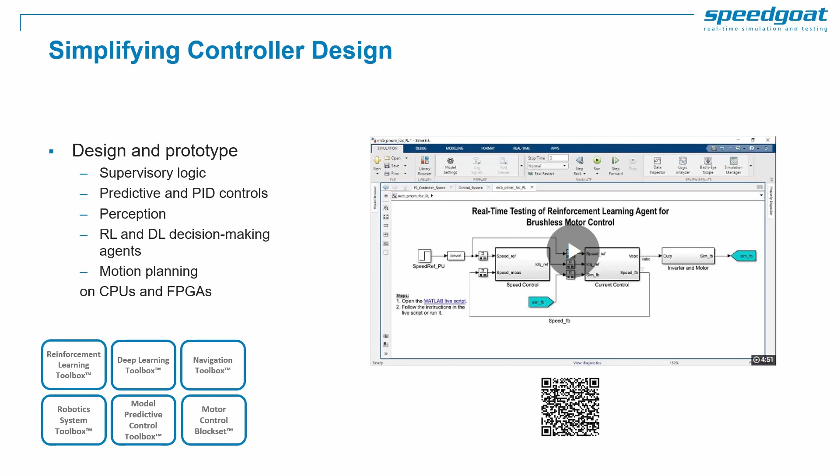I'd like to emphasize one more time the extensive resources all of these toolboxes come with: fully documented examples and reference applications to get you started quickly.

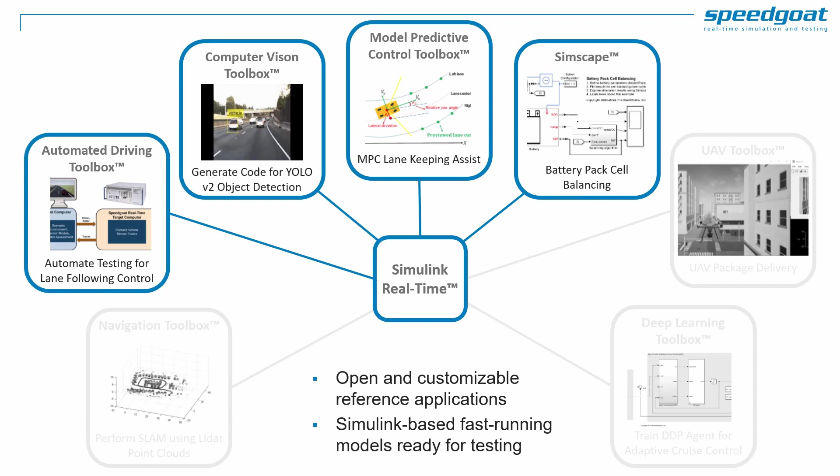Just as a tiny sneak peek, this could be generating code for object detection, model predictive lane keeping assist, battery cell balancing, automated testing of lane following control, UAV package delivery, simultaneous localization and mapping, or training a deep deterministic policy agent for adaptive cruise control.

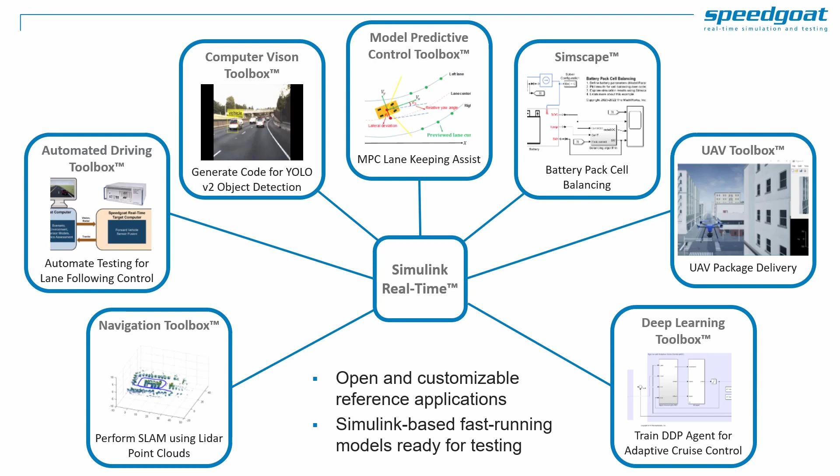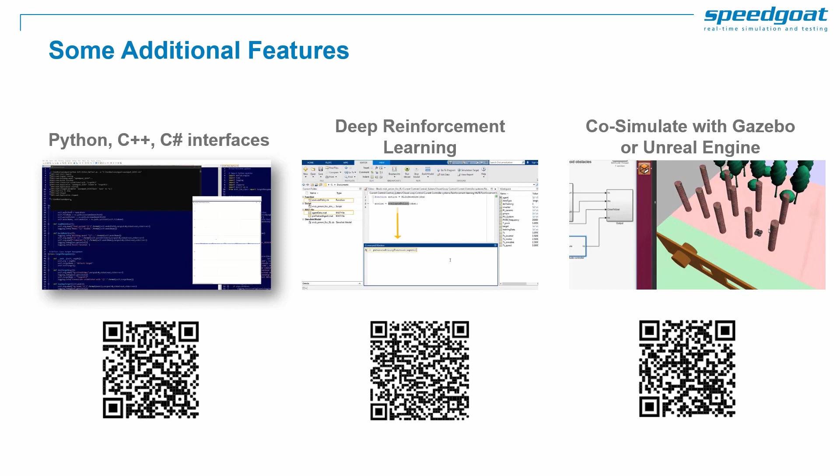And the use of Gazebo or Unreal Engine for co-simulation to visualize your simulation live in 3D. You can do this either on Windows or on Linux, as Simulink Real-Time is fully compatible with both operating systems. If you'd like more information on any of these topics, please refer to these links or reach out to us directly.

To conclude, I would like to come back to a previously mentioned customer success story and how they leverage the Speedgoat and MathWorks tools for real-time testing. Humotech, short for Human Motion Technologies, is a startup which emerged from academic research at Carnegie Mellon University.

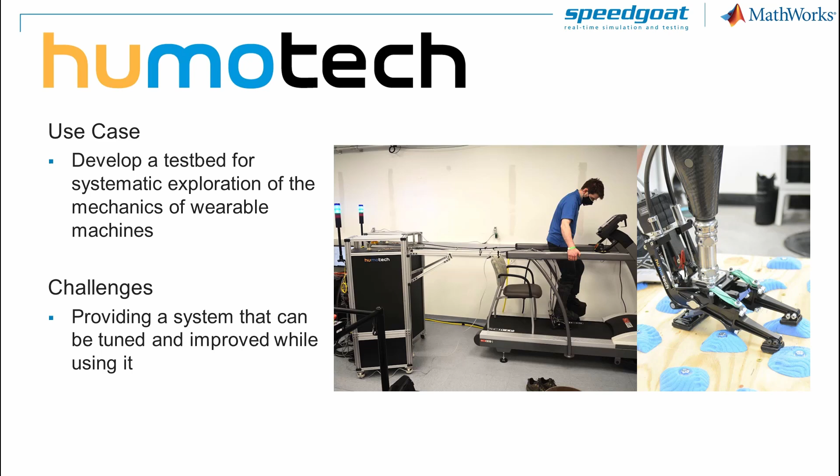Let's hear it from their Vice President, Gabriel Forsyth. Humotech's mission is to transform the way the world develops and uses exoskeletons, prosthetics, and other wearable machines.

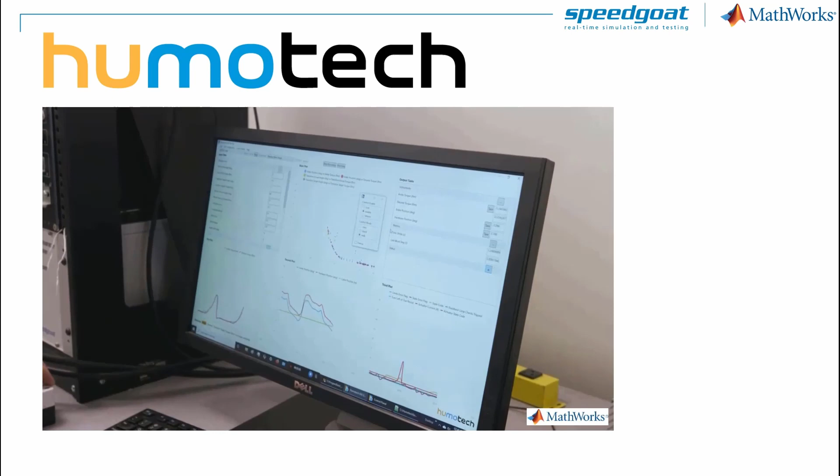The Caplex system is a wearable robotics platform for other innovators to develop upon. It involves physical wearable devices tethered to off-board actuators. It also includes a software component that controls the actuator in real time to regulate the torque applied by the wearable device. The emulator creates the physical sensation of wearing different devices.

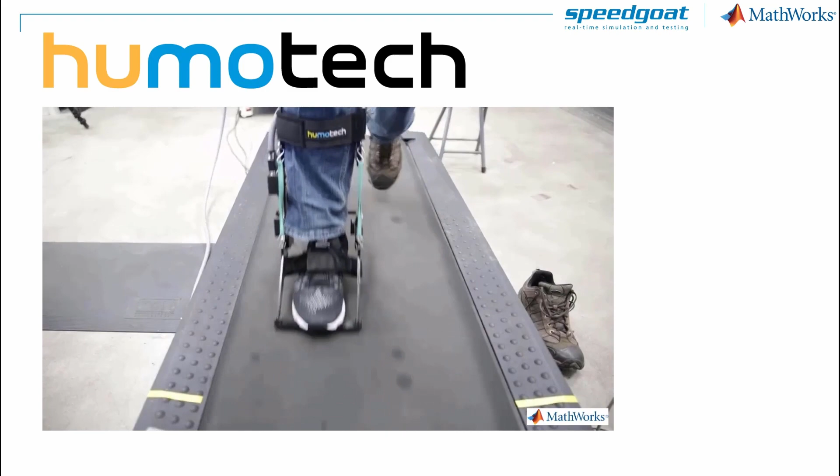So for users, you put on one emulator and try on a host of devices, switching from experiencing one device to the other in between steps without even breaking stride. Being able to compare two devices back to back makes the comparison for the user more precise. Those subtleties might be lost if there's 5 minutes between trying on one device and the next.

Whatever wearable device you have in mind, this sort of serves as a system where you can take that idea and just try it right then and there.

I also want to briefly emphasize how great a partner Speedgoat has been for Humotech, not only for supporting Humotech in building this wearable robotics platform, but also being a great tool for our customers. Our customers include academic, clinical, commercial spaces where users and operators of the system have wide varieties of focus areas and technical skill levels. So we need the system to be both very accessible and very powerful and deep, and Speedgoat fits right in there.

So hopefully this gives you a sense of what is possible with a Caplex system and how Speedgoat is helping to enable the future of wearable machines. Please feel free to reach out if you have any other questions or are interested in learning more. Thank you so much.

Thanks, Gabriel. That's really great to hear. After success with the initial laboratory-based system, the team sets its sights on a new portable version of the platform to enable experimentation in unstructured and real-world environments.

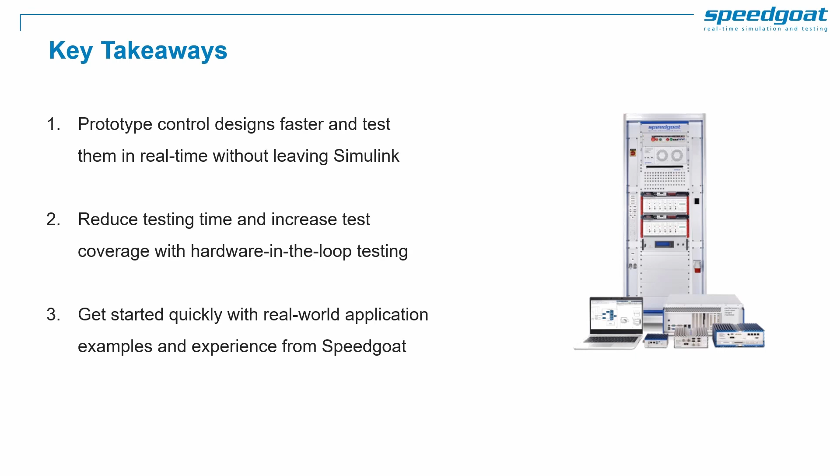Before we start with the Q&A, let me summarize 3 key takeaways of today's webinar: prototype control designs faster and test them in real time without leaving Simulink using Speedgoat test systems; reduce testing time and increase test coverage with hardware-in-the-loop testing; and get started quickly with real-world application examples and experience from Speedgoat.